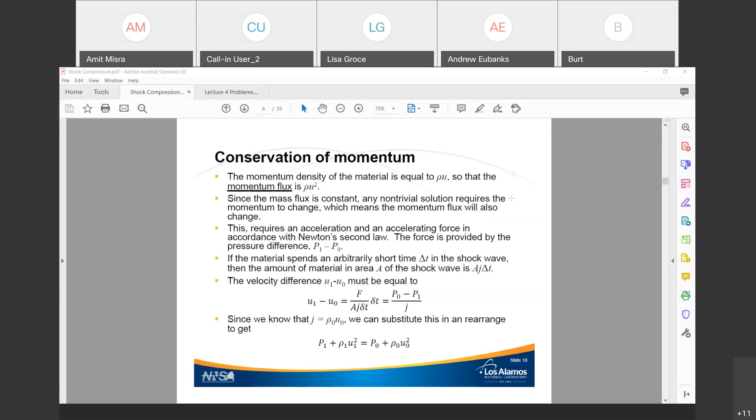So that's actually an interesting question. Let me scroll down and find the discussion of wave interactions. So this is the slide that I had concerning wave interactions between two waves, and the discussion here was assuming two shock waves interacting with each other.

When you have an elastic wave coming in behind — this was in a Lagrangian reference frame, so the material's not in motion here — when you have a second wave coming in, this actually happens: release waves, at least the leading edge of a release wave, is an elastic wave, and they can catch up with the shock wave, and often do. That is actually what gives rise to the shape of a detonation wave in explosives called the Taylor wave.

But what happens, because the shock wave is supersonic with respect to the unshocked material, the elastic wave comes in, it cannot, if you will, penetrate through the shock wave. What it will do is actually modulate the amplitude of the shock wave. When that happens, you get an interaction state at that point. But because it's not actually a material interface, the elastic wave doesn't reflect off the back in the way that you would normally think.

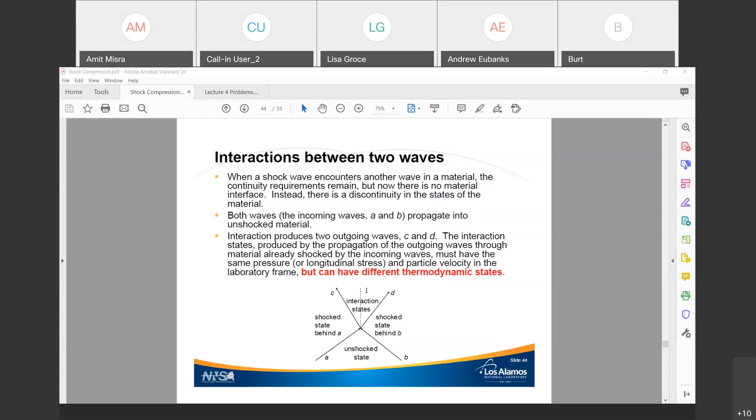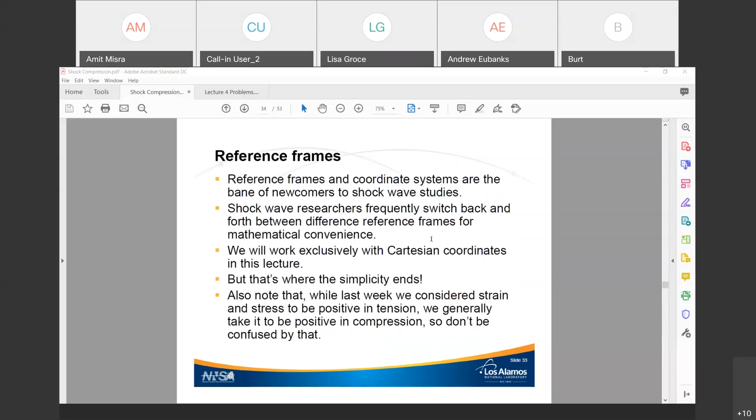Well, there are two primary effects. Obviously, you can have an elastic wave and then what I'll call a plastic wave following it. There may be a time-dependent yielding in the material between those two waves, so that the state — let me go up to right here.

So this is an idealized diagram of, in this case, let's call it an elastic wave and a plastic shock following. In the idealized case, this is a flat top right here. You jump up to some constant stress that corresponds to the yield surface of the material, and then you're constant until the second wave comes through.

In a viscoelastic material, because of the viscous effects after the material has failed, it's sitting on a yield surface, but it's also got a time-dependent response, it will relieve stress in a time-dependent fashion. So quite often you might see it jump up and then decay down.

A second issue is that in the case of a strong shock wave where the elastic wave is overdriven, the viscosity in the material will tend to broaden the wave. I mentioned on Monday that you can think of a shock wave as a Fourier superposition of an infinite number of states, and those states may have different responses. So even though we idealize a shock wave as a discontinuity, in the real world they do have some finite thickness, and that is due to viscous effects in the material quite often.

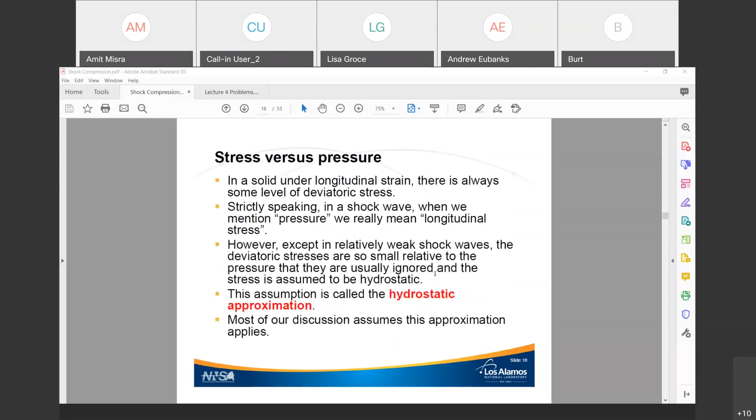Okay, thank you. We have two more questions that have come up. One is from Yupeng Zhang. This is about how the energy is calculated. He said in the lecture you mentioned that energy flux is mass flux times the sum of enthalpy and kinetic energy, which means that energy consists of a kinetic part and enthalpy. Yes. So why is it that only enthalpy is used to calculate the energy?

I think he's referring to the equation, E plus PV. Yes. So the reason we only have to deal with, okay, we have to deal with both terms, but the only change that is put in by the shock wave is kinetic energy, for the simple reason that the shock process is adiabatic. So enthalpy is heat. We don't have time to put heat in.

So whatever happens to the kinetic energy, we have to make a corresponding change in the enthalpy, and really where that comes from is the combination of internal energy and the pressure volume work, which again, because it's work, is more related to the kinetic energy side of the equation than it is to the heat side of the equation.

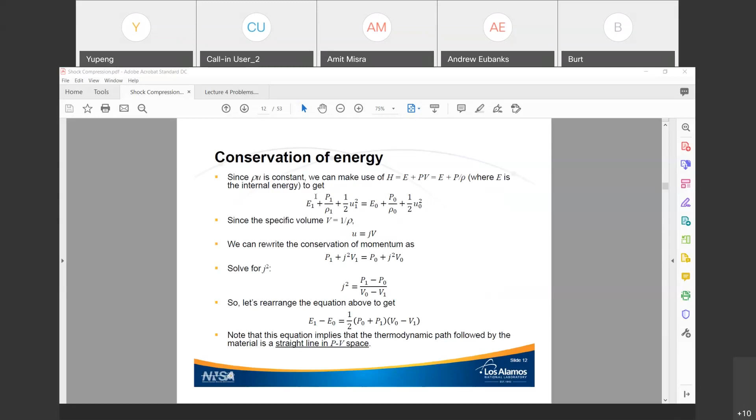Yes, this is the formal way. If you go to any of the books that really go into this in detail, you tend to find the equations written in this form, or the place you actually tend to find them, in books on gas dynamics that discuss compressible fluid flow. You will see this. But these are fundamental equations.

It's total internal energy that we're dealing with, and so you have a heat part and a work part. So the combination of the change in enthalpy and the change in kinetic energy is the total energy in the system. Right. Actually, I understand.

Yeah, just because this is a fundamental question, because I'm in solid mechanics. So in mechanics, because we are talking about discrete systems - actually, because in this question, also in this shock wave problem, you mentioned that we consider the materials as discrete, or say as a discrete system, that atoms are not continuous. So in this case, may I use the Hamiltonian instead of this definition of energy? Just use the Hamiltonian as the total energy for the whole system, so that I can build up a new set of conservation of energy equations for the body.

You can, but fluid dynamics, shockwave dynamics, all those things, the derivations are all done in the continuum rather than assuming discrete. You can actually derive a lot of the equations without too much trouble assuming discrete particles rather than a continuum. It's just that originally, when these equations were developed, they don't really have a meaning if you're down below the continuum level. And so we never really think of them in terms of being down at the atomic level.

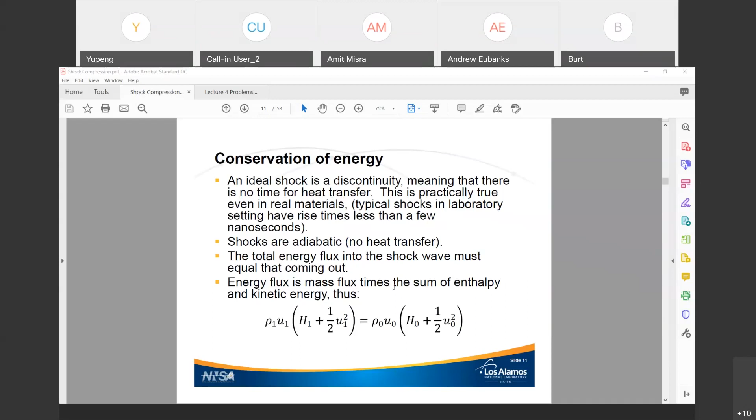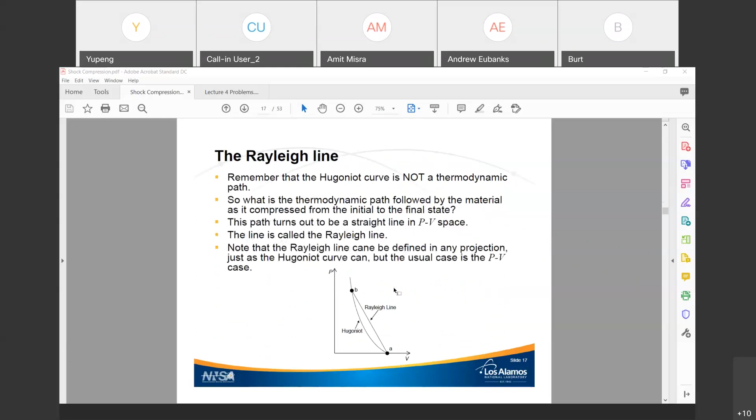Yeah, so as I pointed out last week, there are stress deviators. The material, it's a solid, it's sitting on a yield surface. So there actually are stress deviators, and there is strain, and there is energy associated with that.

The general assumption that is made is that the amount of energy relative to the energy in the shock wave is negligible, that the stress deviators can be ignored for most purposes. Obviously, at lower stress, in particular where the material actually exhibits a two-wave behavior because of an elastic wave followed by plastic yielding, giving rise to what's known as the Hugoniot elastic limit, that assumption becomes less and less good.

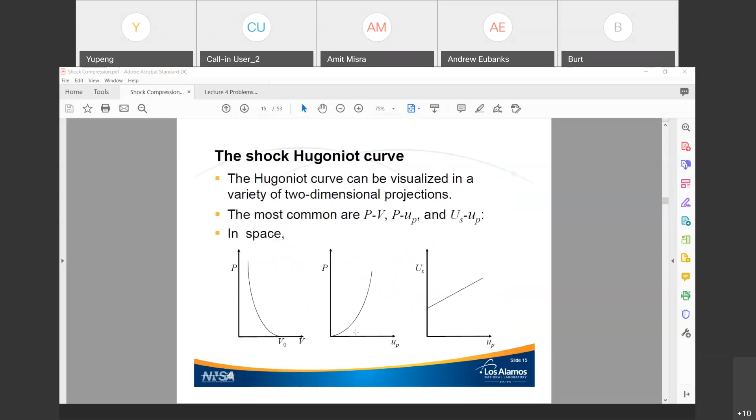And of course, the lateral stresses are related to the longitudinal stress by the Poisson's ratio. Because the material has strained, the Poisson's ratio may not be exactly the same as what we would measure if we were to go into a lab and do ultrasonic measurements of shear and longitudinal waves. So that's part of the reason I didn't put this in, because there's more to it than just the simple Rankine-Hugoniot equations as normally applied in shockwave work.

Yupeng has another question about plastic flow: it needs time to develop, where shock wave happens within a few nanoseconds. So how does plastic flow develop in shock waves?

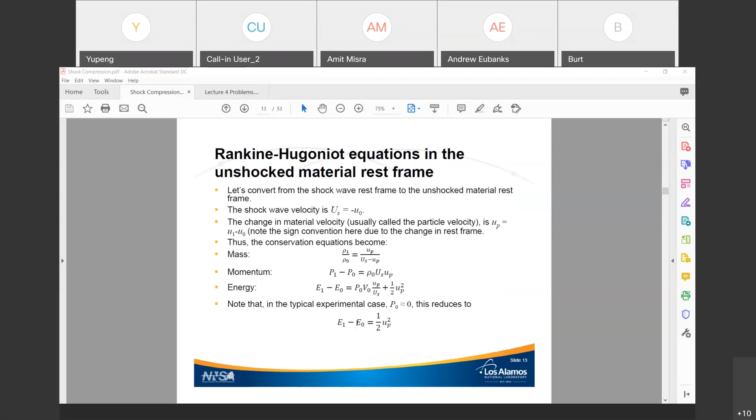Okay, so going back to the Hugoniot here that shows this, what actually happens is this wave is an elastic wave, and it is terminated by plastic yielding. And this is sort of, again, idealized. If you look at a real wave profile, this is not going to be flat. It tends to ramp a little bit, and that's partly because of that.

If you look at just about any material that I've dealt with, tin is a good example, this isn't a sharp break. It'll be rounded a little bit and things like that. But things do happen very fast.

And that's one of the reasons why I discussed the question of equilibrium, and we can talk about both thermal equilibrium and mechanical equilibrium. The shock wave, what happens in the shock wave sort of is driven by atomic vibration velocities. It only takes a few vibration periods for an atom in a potential well for things to happen.

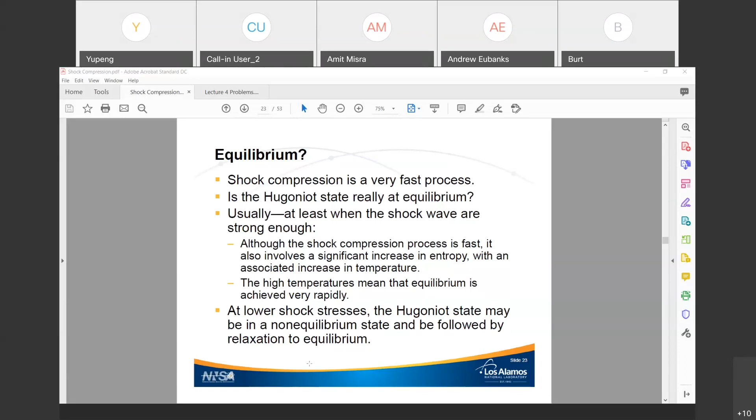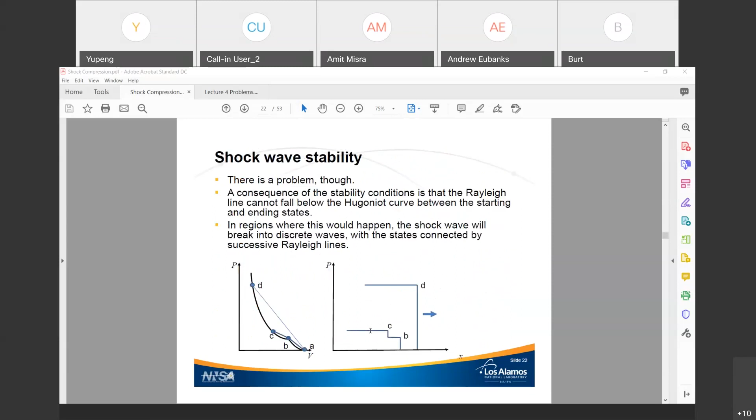Now, in reality, let's hypothetically take an impactor. If I can find the diagram here - if you take an impactor and it impacts a target and you were able to watch what happens as time progresses from the actual time of impact, what you'll notice is that in the case where there is an elastic precursor, by definition, because the impact is an instantaneous event, you generate a single wave. And that wave will then break up.

But the breakup - what you would actually see is as the wave propagates, the amplitude of the wave will drop. And you will see another wave with a very large amplitude, equal to the initial amplitude, start to emerge. But as it emerges, it decays very rapidly to some point where it eventually achieves an equilibrium amplitude. So there is non-equilibrium stuff going on, especially early in the run of a shock wave that's generated by an impact or any other kind of instantaneous event.

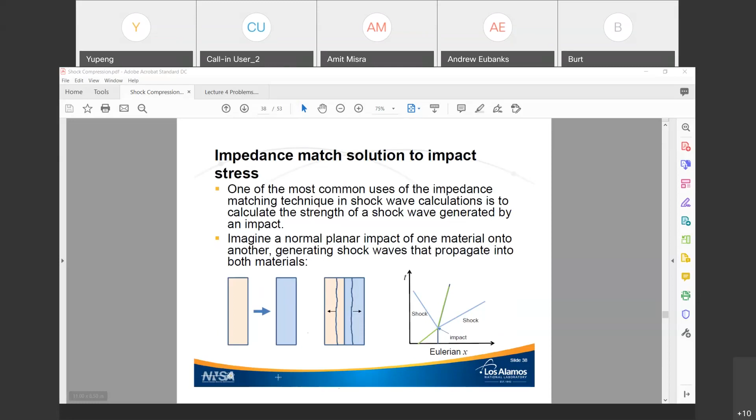So I guess we can now go and look at the homework problem solutions. Okay, let's see here. Do you see the lecture 4 problem review slides? I wanted to make sure that it's switched properly. Okay, so I gave you 2 problems. One was a relatively simple problem.

So imagine a material has a principal Hugoniot - remember, that's one that starts at room temperature and effectively 0 pressure. And you've got some initial density and an intercept and a slope for the linear Hugoniot. It has a thermodynamic Gruneisen parameter that is described by gamma rho as just being a constant. That is actually quite a common assumption, and in most cases not a bad assumption, at least for solids. It doesn't work so well for liquids.

How would you go about calculating the Hugoniot of the same substance starting from a different density? We assume here starting pressure is 0 and there's no difference in the starting energy. Well, if you remember...

I actually discussed calculating a Hugoniot from an equation of state, and it is that problem. So I'll go down here to this bottom equation. It's the same problem, but our reference curve in this case happens to be the principal Hugoniot rather than an isentrope or an isotherm or something like that.

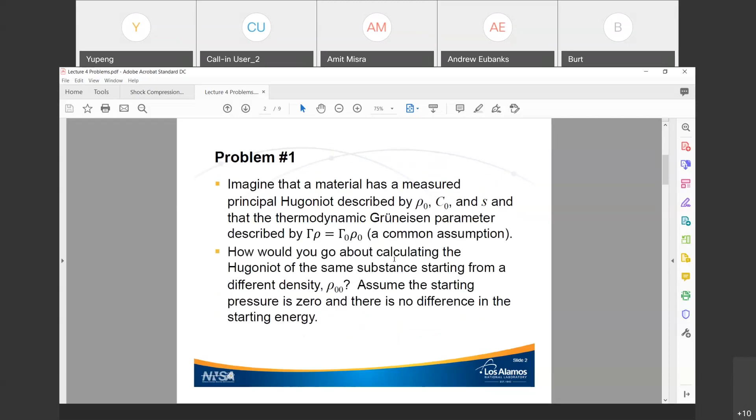Energy of a reference curve, which is going to be the energy on our principal Hugoniot, and the pressure of a reference curve, which is going to be the pressure on our principal Hugoniot. And then this, of course, VH over gamma H is going to have to obey this requirement here that gamma rho is a constant in our problem.

So since we know ETR, the transition energy 0, V naught naught is 1 over rho naught naught, and gamma rho, which is the same as gamma over V, is equal to rho naught gamma naught, we can rearrange that equation to give us a pressure equal to the energy on our principal Hugoniot minus 1 over gamma naught rho naught times the pressure on our principal Hugoniot, divided by the things that were coefficients of this pressure here, V naught naught minus VH over 2 minus 1 over gamma naught rho naught.

So everything here is known. That's all principal Hugoniot or our starting volume, which we assume we know. And the left-hand side is the pressure. Okay, now we need to know these other things.

Well, we just go backwards through things. So here's our internal energy in the shock wave. We plug in pH tilde, 1/2 of that times V naught naught minus VH, which is also going to be equal to 1/2 times the new particle velocity squared. That gives us the energy.

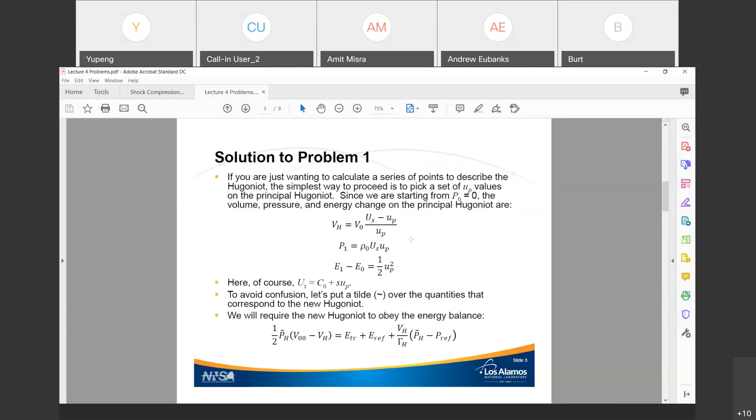And then we just rearrange this equation, plugging in the new values to get the shock wave speed. And there we have everything we know. We know UP, we know US, and once we know those, of course, we can fit what would probably be a second order polynomial, so a quadratic.

Typically, when you take a linear Hugoniot and you do this, you end up with curvature in the new Hugoniot, and so you might have to add an extra term in a fit of US versus UP. Now...

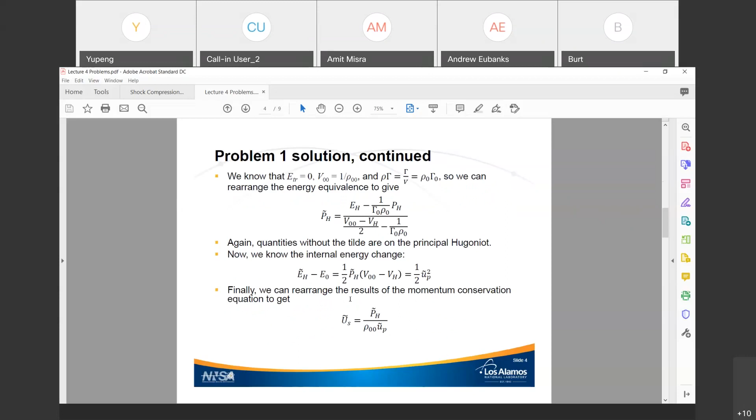I had noted in the lecture, if you happen to want a particular point, and really the only thing you can specify a priori is the volume on the new Hugoniot, you would first calculate the corresponding value of UP on the principal Hugoniot using this, where I've rearranged the volume ratio or the density ratio to get the particle velocity. So that's the solution to that problem.

Are there any questions? If not, we'll move on.

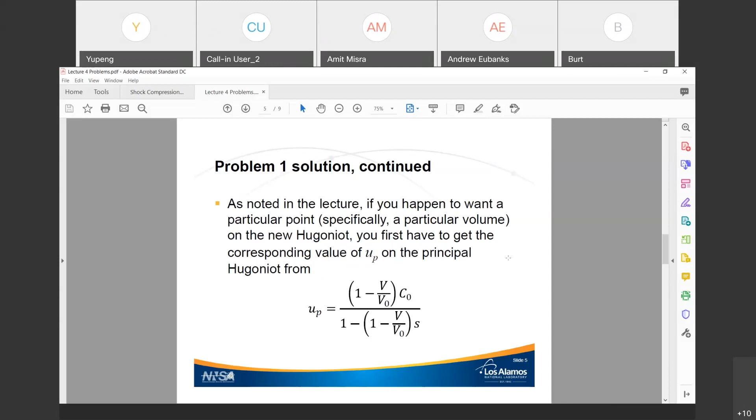The second problem, this is actually something that's done fairly often as just a quick and dirty estimate. One can actually do a better job than this, using a Hugoniot plus Mie-Grüneisen equation of state in order to get a release adiabat, but this is one that sometimes people use to do a very quick calculation.

So the Hugoniot is not a thermodynamic path. It is a locus of end states of the shock process, but the shock process does not actually go along the Hugoniot. It goes along the Rayleigh line.

But even so, if you take a material that's not porous, so it's full density, so basically its Hugoniot is described by the principal Hugoniot, that curve in pressure-volume space is often quite close to an isentrope or an adiabat, which we assume to be an isentrope. And so people will use the Hugoniot to approximate the isentrope.

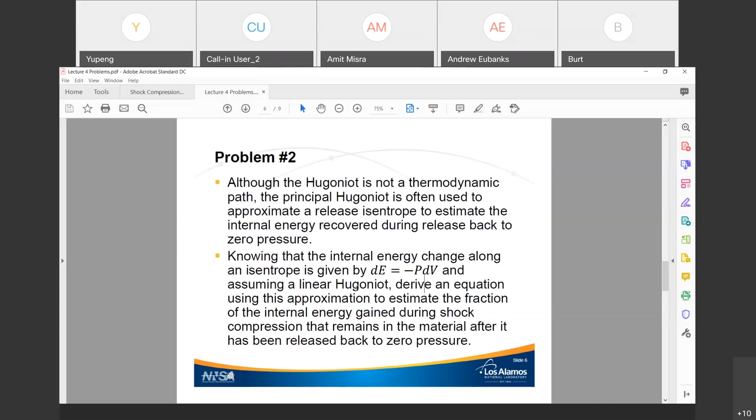The way to do this when you have a Hugoniot is to start by casting both P and V - and remember, I'm assuming a principal Hugoniot right here, so P naught is 0 - we cast both of these in terms of the particle velocity. And the reason we do that is we need some way to do this integral analytically.

So doing that, P is just what it is. If we differentiate V, we come up with this. Depending on how you go about doing the differential, you might take a few more or less steps to end up at this state. And this actually reduces to this right here.

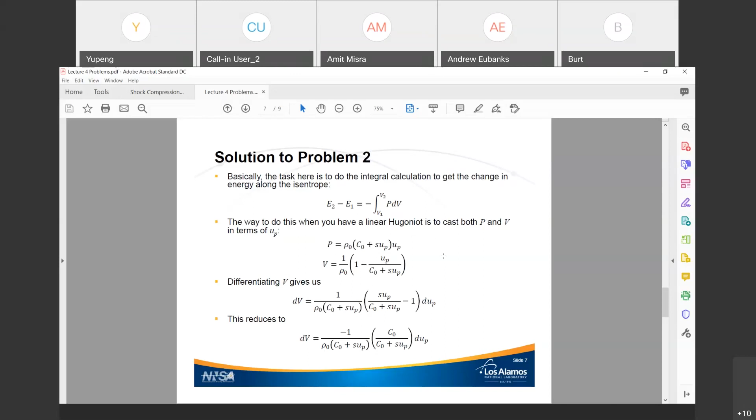So you'll notice that P is rho naught times US, which is what this is, times UP. Here's rho naught times US here. There's a negative here. So when you take this and multiply it by that, and take the negative of it, you end up with this expression for minus P dV. And this is obviously easily integrated.

You can do it, you can go look up the integral, or you can actually work it out. The easiest way to work it out is to actually do it in terms of US, and then do the variable conversions. But let's assume that we've done the integral.

Here's again what we're doing. We're going from a particle velocity that was on the Hugoniot back to a 0 particle velocity. That corresponds to the Hugoniot volume, to the volume at 0 pressure. Actually doing this integral, notice I've got this as an approximation still.

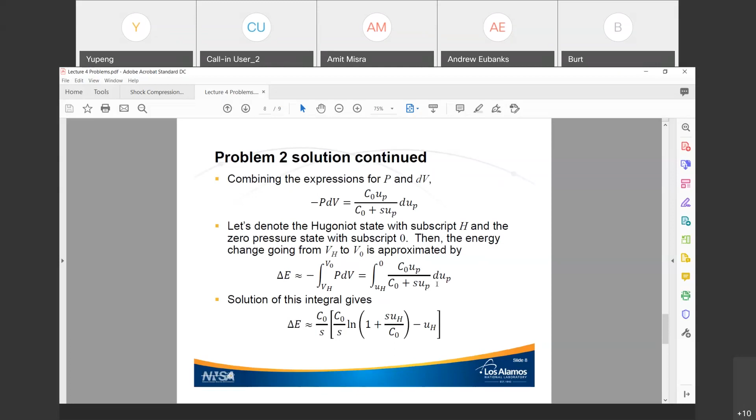This approximation gives us this quantity right here. It's a logarithm that corresponds to the 1 over C naught plus S UP part of this, and then there's just a linear term that is C naught over S.

So the original question asked for the fraction of internal energy originally gained in the shock wave that stays in the material. To do that, keep in mind that this is a change in energy going back down to 0 pressure, so we add that to the original energy gained in the shock wave.

And we're normalizing that - we're asking for a fraction, so we're going to normalize that. And when we reduce that, we get this as the final value. If you look at the units, wave speed over wave speed squared times wave speed, so this is a pure number.

And if you were to go and actually pick some numbers, the limit of this as UH goes to 0 - in other words, going back to effectively an infinitesimal elastic wave - the limit is 0. And the limit, if UH goes to infinite, is 1. So the higher the shock pressure in the material, the more of the internal energy you put in will remain in the material when it releases back to 0 pressure.